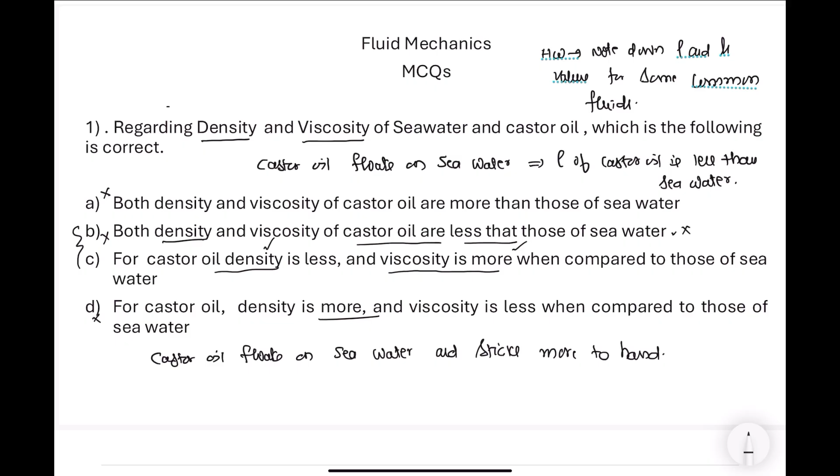I think you understood this concept, and as homework, note down rho and mu values for some common fluids. As we discussed, similarly, discuss on your own and find out why a particular value is more for a particular material or fluid, and why a particular value is less for another fluid. Compare your densities and viscosities. You need not remember the values, but try to understand the concept.

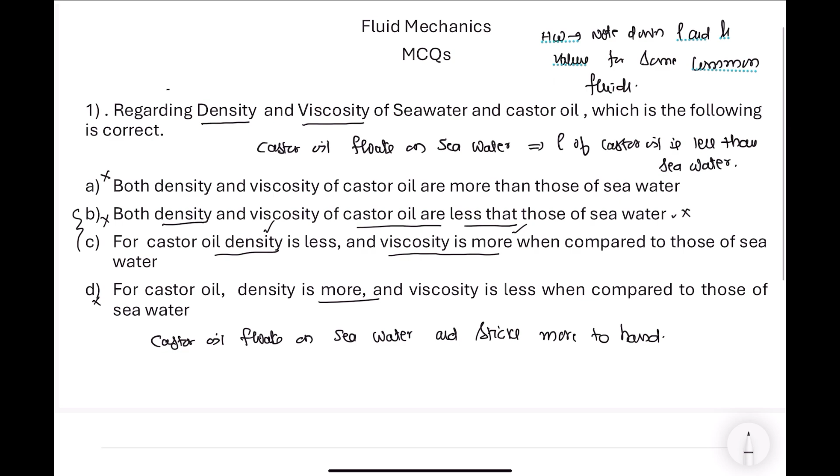Our next question is a very good question.

The equation T2 by T1 is equal to P2 by P1 to the power of K minus 1 by K, where K is the specific heat constant, is applicable when the process involved by the fluid is... Instead of specific heat constant, we can write specific heat ratio. Please read it as specific heat ratio, that is Cp by Cv, which is equal to K. We can even say it as gamma, sorry not lambda, gamma. T2 by T1 is equal to, it's a very important equation, please remember, gamma minus 1 by gamma. This value for diatomic gas is 1.40.

Now please try to understand in depth what this question says. This particular equation is valid, is applicable, when the process involved for the fluid is of a certain type. There are many types of processes for a fluid flow. On this topic, many questions are asked in staff selection JE examinations, especially regarding pressure variation with temperature as you go up in altitude on earth. That type of question was asked in 2024. Now, it's not that the same type of question will be asked again. The question can be a twisting and deep question like this one also. Ultimately, we have to understand what the process is. The process is controlled by the relation between temperature and pressure, given by this equation: T2 by T1 is equal to P2 by P1 to the power of gamma minus 1 by gamma.

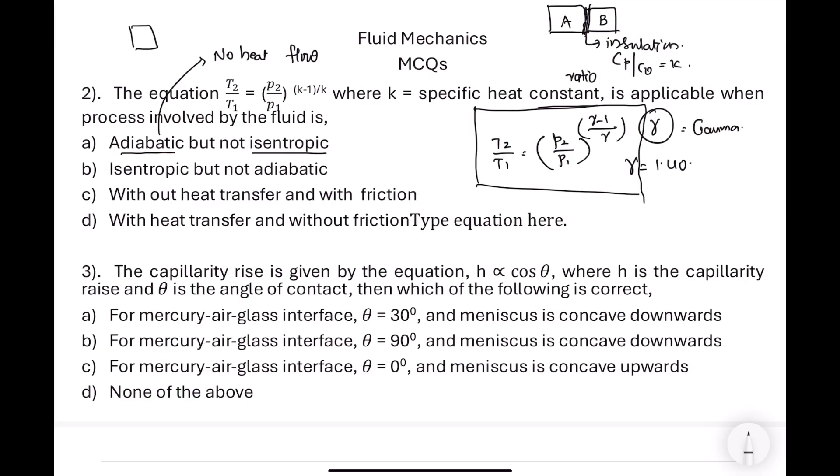Then you should know what is adiabatic and what is isentropic. Adiabatic is the process where there is no heat flow across the boundaries, no heat transfer across the boundaries. That means there is insulation. Consider one body A and body B, there is a boundary and it is insulated between A and B. Insulation is there, so there is no heat transfer. For example, take another body, put it in an insulating container like this, and there is no heat transfer from this to the atmosphere. This is also called an adiabatic process. That means when there is no heat transfer, that process is called adiabatic process.

Now, what is isentropic process? Isentropic relates to entropy, entropy is same. Entropy is same means there is no friction. Isentropic means no friction. Adiabatic means there is no heat flow. This equation is valid when it is both adiabatic and isentropic, that means there is no friction and no heat transfer.

Then we can get these ideal equations. We have simulated a system wherein we thought that there is no heat transfer and no friction involved in the process. If friction is involved in the process, what happens? Friction creates heat, that means heat should go on increasing because of the friction, and entropy goes on increasing. Iso means what? Iso means constant, that means entropy is constant. Entropy being constant means there is no friction, that means heat is not getting generated. Neither is heat transferred from one body to another or from one environment to another, nor is there any automatic increase of heat in a system. Then that system is called adiabatic and isentropic.

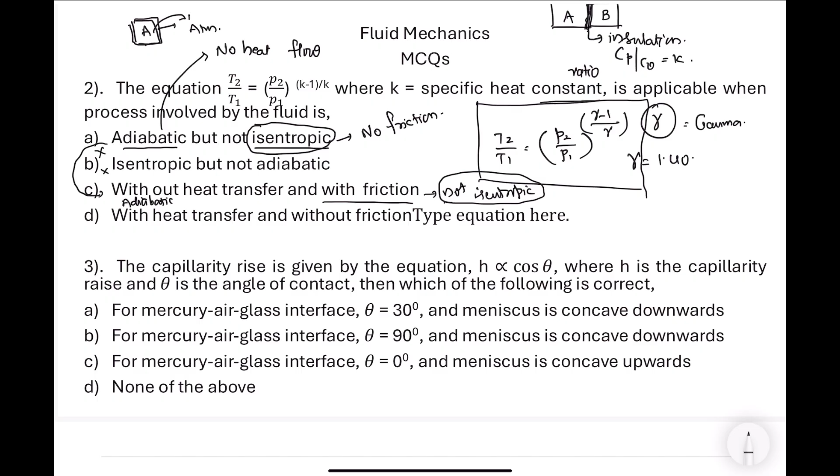Without friction, with heat transfer and without friction, it is isentropic. With heat transfer means non-adiabatic.

In this beautiful question, the answer is not given. A, B, C, D all are wrong, and this question is made by me, only to make you aware of the engineering meanings of the processes. It's not about your correct answer or wrong answer. The equation is applicable when the process involved by the fluids is both.

Isentropic and adiabatic. Isentropic means no friction. Adiabatic means no heat transfer. Please try to understand this.

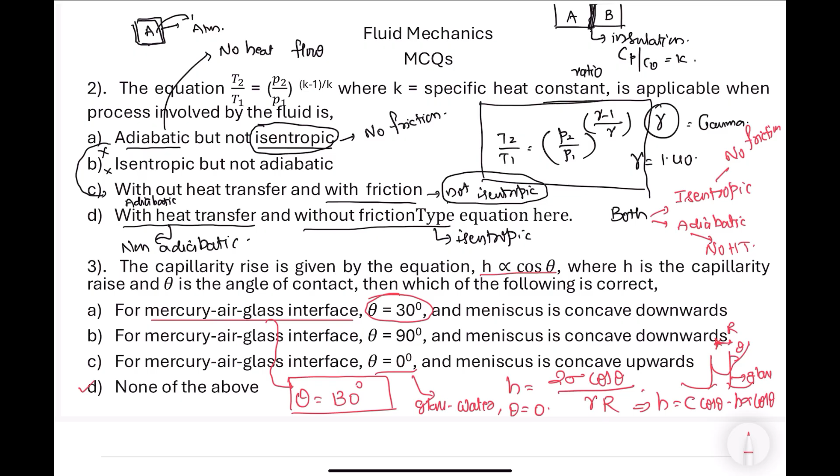Next we will go to question number 4. The vapor pressure is the pressure of the vapor exerted by gas vapor at a particular temperature. We can even call it the saturated vapor pressure. The value of the saturated vapor pressure of a particular material at 20 degrees centigrade.

Instead of material, we can say fluid, or material, or anything. At 20 degrees it is 2.34 kPa. Usually, it is always better to remember the STP values, standard temperature and pressure values, of different fluids. That's very, very important, because questions may directly involve certain constants at STP and NTP, normal temperature and pressure, standard temperature and pressure. 20 degrees centigrade involves the standard temperature; we can say it is a laboratory temperature, or a temperature at which we regularly measure the values.

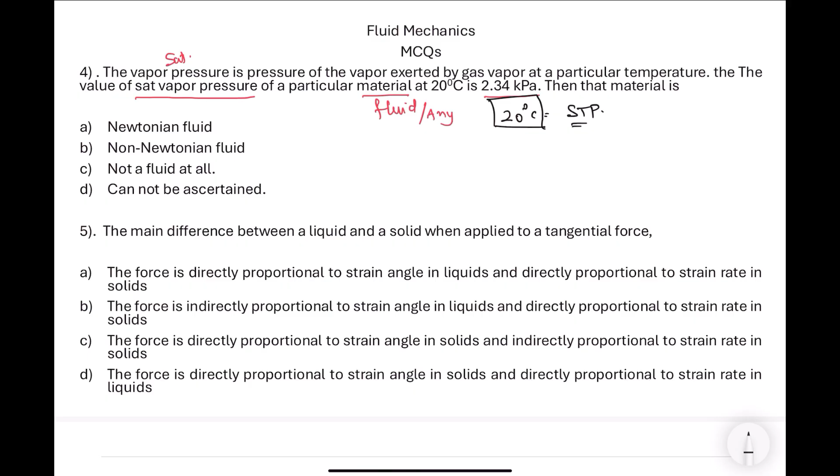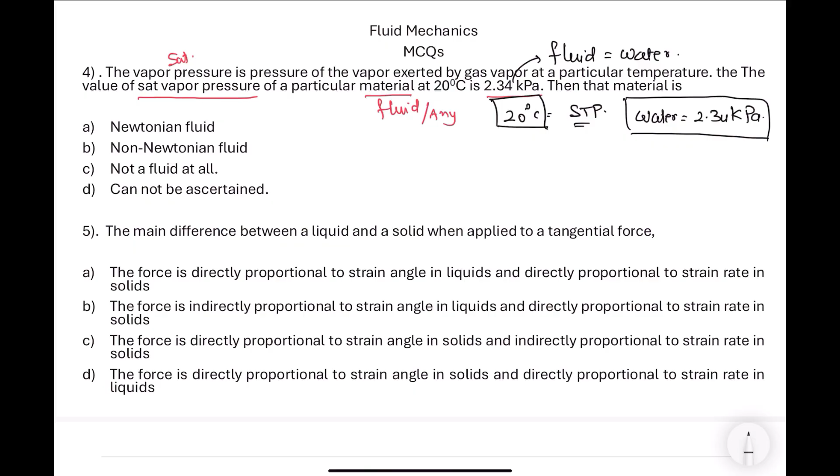The value of saturated pressure at 20 degrees for water is 2.34 kPa. Please remember this value. For water, that means indirectly with this value I am telling it is a fluid and it is equal to water. If you know this value, then you can easily understand what is it. What is that material? That's a fluid and that is water.

Is water a Newtonian fluid? That is the question here. What I have asked, you know it is water. Then that material is a Newtonian fluid. Is it a Newtonian fluid? Is it a non-Newtonian fluid? Or is it not a fluid at all? This question is wrong, because we found that material as water and cannot be ascertained. This is also partially wrong. Now we have to find between Newtonian and non-Newtonian fluids.

For your information, water and air are Newtonian fluids, because they follow Newton's law of viscosity: tau is equal to mu into du by dy. This is what Newton's equation states. Water and air are Newtonian fluids. We just say water and air are the two important fluids.

Questions can be asked by giving the saturated vapor pressure, melting temperature, boiling temperature, or density of water. What is density of water? It is 1000 kg per cubic meter at STP. Then what is the density of air? That is equal to 1.204 kg per cubic meter. Please remember, the density of air is almost 800 to 900 times lesser than that of water.

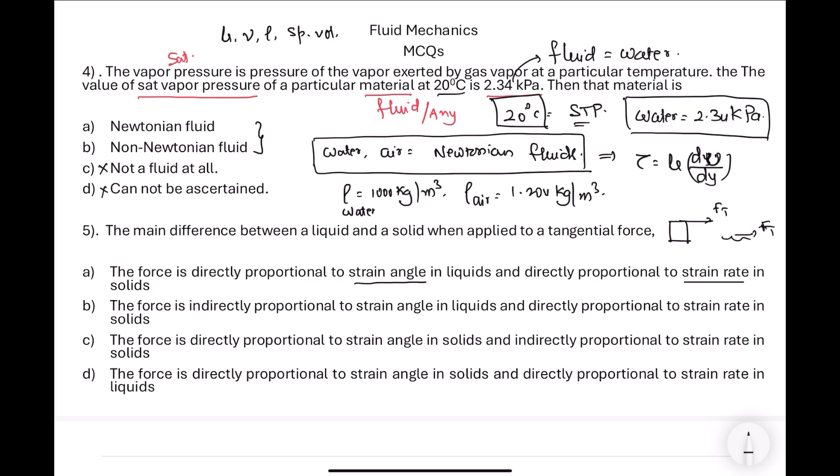Now, for example, let us try to understand the process of this tangential force effect. On a solid surface, take a rubber, like a school student's eraser, keep it on the table, and put your hand on top of it and give a little push. What happens? The rubber bends like this. Do you agree? The rubber takes a new shape like this.

Do you agree? This angle is called the strain angle. Because it is a solid, you can measure the strain angle. As the force increases, what happens to the strain angle? It increases. That means strain angle is directly proportional to the tangential force in case of solids. The force is directly proportional to strain angle in case of solids.

Now, in case of liquids what happens? Remember the definition of liquids from my first lecture: whatever may be the smallest force you apply tangentially on a liquid surface, the liquid goes on moving and flowing as long as that small force is applied, irrespective of the quantity of force. That means strain angle cannot be formed here because the fluid is continuously flowing. Hence, the strain angle concept is not applicable in case of liquids.

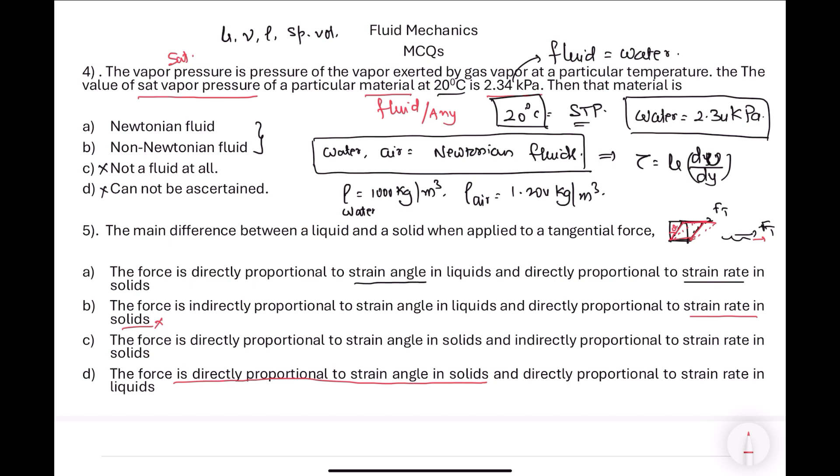Strain angle is not applicable and strain rate is not applicable in solids, hence that option is also wrong. The force is directly proportional to the strain angle in liquids - strain angle is not applicable in liquids, hence wrong. Whereas the force is directly proportional to the strain angle in solids and directly proportional to the strain rate in liquids. As strain rate increases, the flow increases. The force increases, and as force increases, strain rate increases.

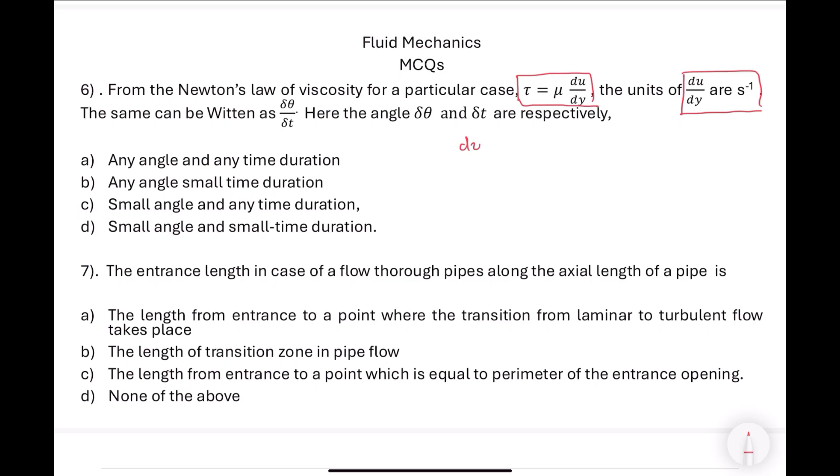From Newton's law of viscosity for a particular case, tau is equal to mu into du by dy. The units of du by dy are per second. What is du by dy? It is change in velocity, so dimensions will not change, meters per second, divided by change in distance, also meters. The meters cancel, giving 1 by second, that is second to the power of minus 1.

Now, can we write the same in terms of delta theta by delta t? I have shown you in the rubber example, the original rubber is like this, and after application of some tangential force, this made an angle theta, in a time delta t. Does theta have any dimensions? And what are the dimensions of delta theta by delta t? They are also per second - degrees or radians, whatever you call it, radians per second, degrees per second.

Mainly we can approximate du by dy with delta theta by delta t, where delta theta and delta t are the angle and time respectively. Can it be any angle? Can the time be any duration - can it be infinity, can it be 100 hours? Can you go on applying pressure on a rubber for 100 hours? You can apply the pressure for a very short duration and a very short angle, meaning small deflection. If you take material like steel, the deflection can be very small. When you take rubber, the deflection may be larger compared with steel, depending upon the crystalline structure of the material concerned.

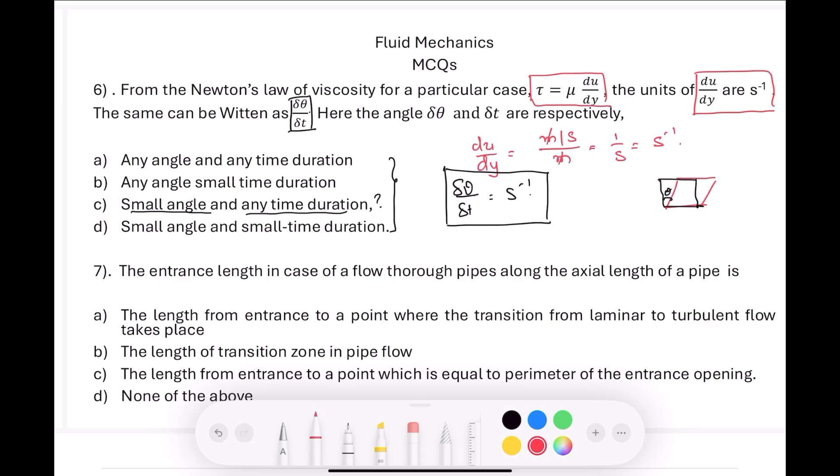Now, small angle is accepted - it can be for a small angle. But is it for any time duration? That is the question mark. This question I am leaving to you as homework, a question I have made on my own to test your knowledge. Small angle is accepted - find out whether it is C or D, which one is correct. Is it for a small duration or any time duration? Please see the textbooks, try to understand and answer this question.

Sometimes I feel that a question out of some 10 questions should be left for your thinking process, sharpening your thinking process.

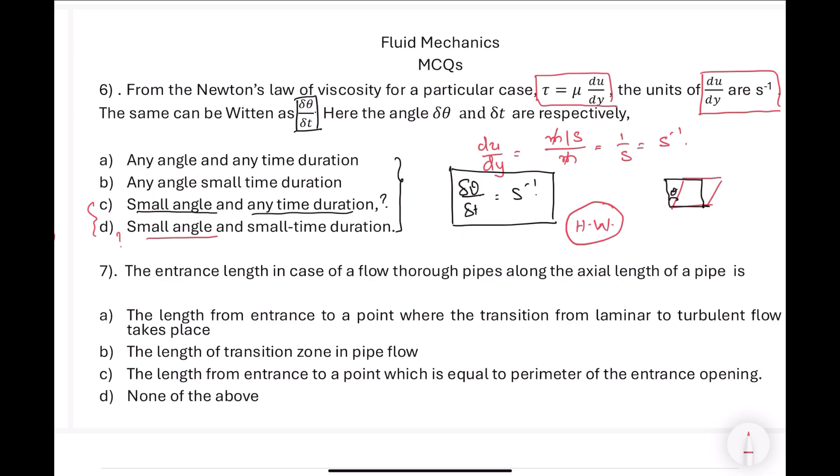Next comes the entrance length in case of a flow through pipes along the axial length of the pipe. I have explained in the first lecture what is flow through pipes - it's very important and a common example. Water distribution, gas distribution companies, chemical distribution facilities in plants and general water distribution, everything is dependent on pipes. Now, there is a pipe, and fluid is flowing inside it. The pipe is, let us say, circular, or it can be rectangular also, depending upon the requirements.

What is the axial length? Please try to understand. Movement along the axis is called axial length, measurement along the axis. What is the radial length? When you measure the length along the radius, this is radial length. Please try to understand - axial length and radial length.

Now, the entrance length in case of flow through pipes. There is an entrance - you send the fluid inside the pipe and it goes inside and flows in the pipeline. This is the entrance point, point A is the entrance point. There is one term called entrance length - please remember this, it is very, very important concept in fluid mechanics.

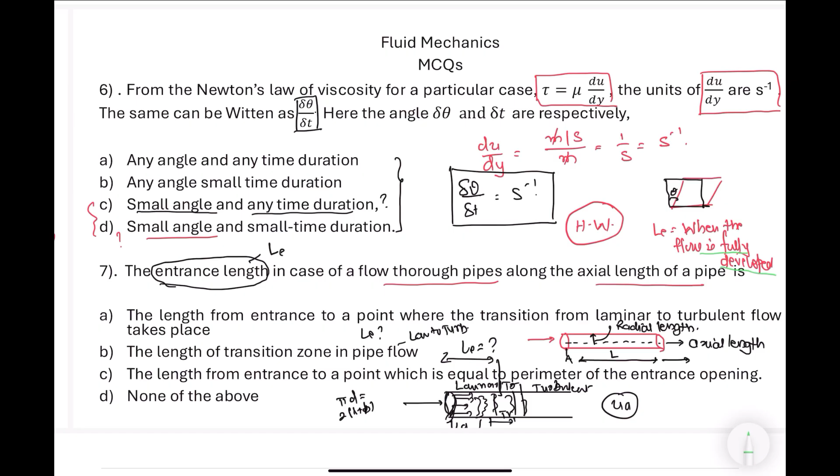Entrance length is the length when the flow is fully developed. Please try to remember this sentence. When the flow is fully developed, that means when a flow starts inside a pipeline, the flow will not be fully developed like this, as I have told you many times in previous lectures.

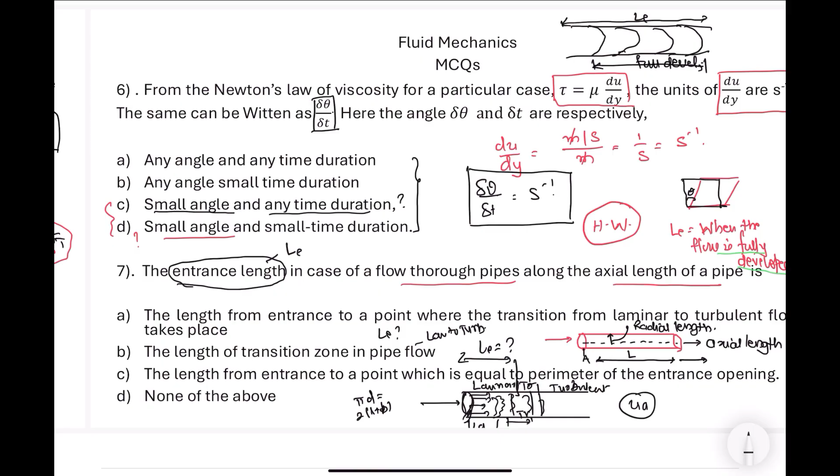The pattern will be like this, then it will be like this, then it goes like this, parabolic, and this is the length where it becomes fully developed. That means when the distribution pattern becomes regular and the flow is fully developed, the length from the entrance to the place where the flow is fully developed, that length is called LE. So the answer is none of the above.

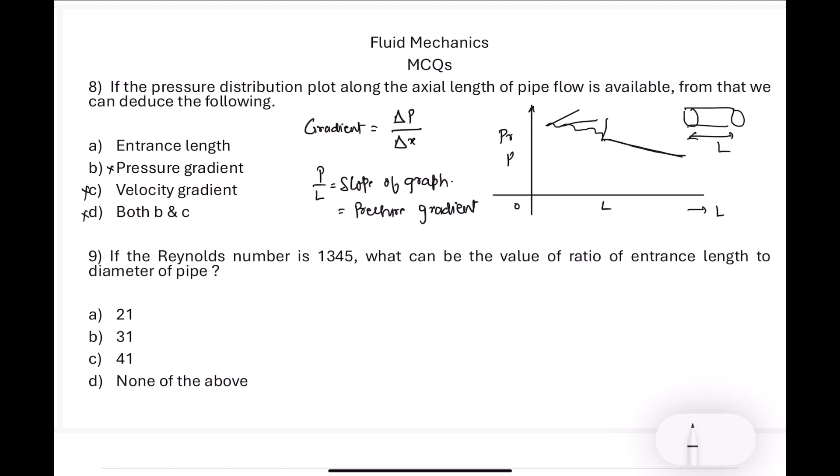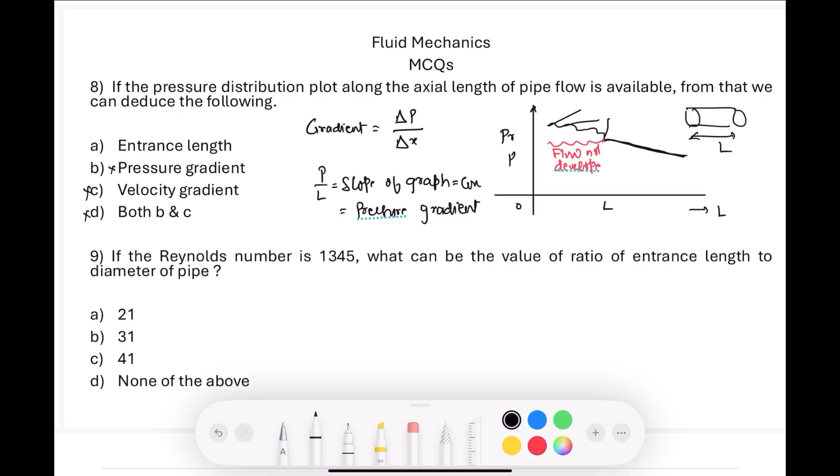Now, when do we find out the entrance length? That's the question here. The entrance length can be found out from when the flow gets fully developed. What happens here? Flow is not fully developed. Please see, here flow is not developed fully, but here the gradient slope is constant. Slope is constant, that means the slope of the graph is constant, which implies the flow is fully developed.

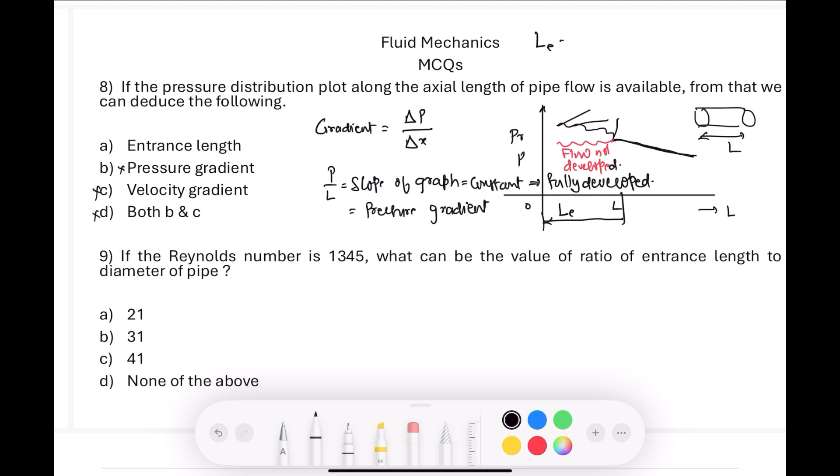If the pressure gradient is constant in the pressure distribution versus axial length graph, then we can say the flow is fully developed. The distance at which the flow is fully developed is called LE, the entrance length. That means dou P by dou X is equal to constant for fully developed flow. Please remember this. The answer is A.

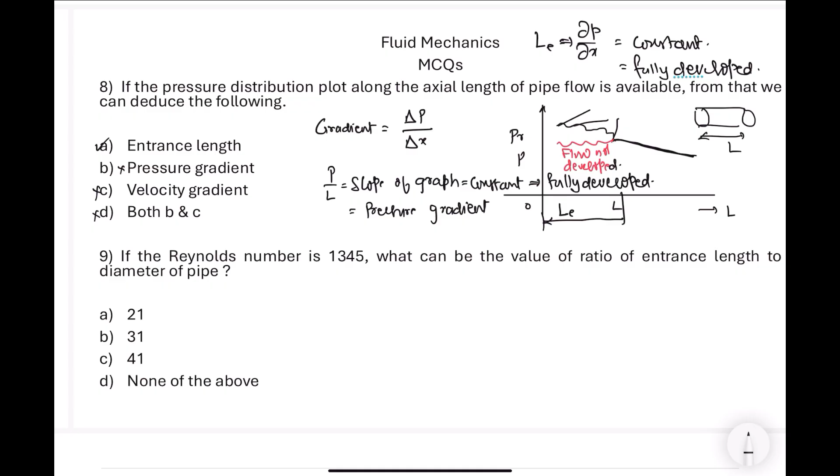If the Reynolds number is 1345, what is Reynolds number? Reynolds number is equal to rho Vd by mu. I have explained very well what is Reynolds number and what type of velocity to take in the Reynolds number, in my first, second, third lectures. Now this Reynolds number of 1345 is given. What is the importance of Reynolds number?

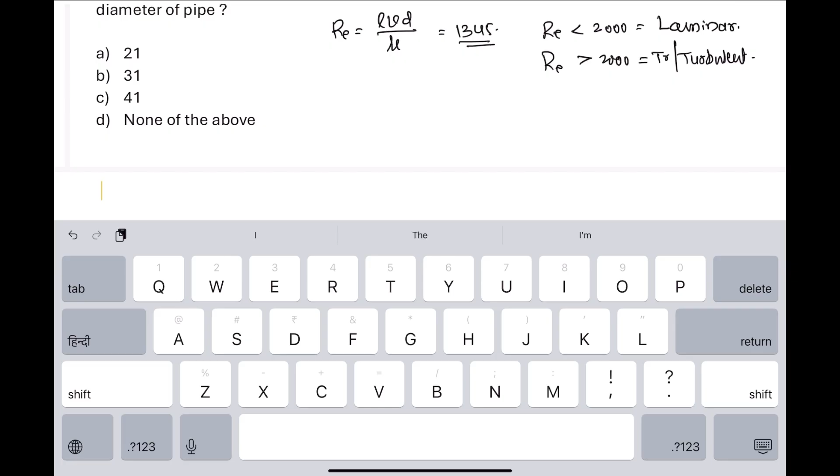If Reynolds number is less than 2000, the flow is laminar. If Reynolds number is more than 2000, it is transition or turbulent; you can give some value for transition up to 2500, 2700, then it becomes turbulent. Now here the Reynolds number given is 1345. That means the flow is laminar.

For a fully developed laminar flow, the value of LE, entrance length by diameter, is equal to 0.07 RE. Therefore LE, what is asked, is the ratio of entrance length to diameter. This is a very, very important ratio, LE by D, which is equal to 0.07 into 1345, that is approximately equal to 91.

The value of 91 is not there among the options, hence none of the above is correct. It's a very simple formula, 0.07 RE. Once you know the Reynolds number, you can find out whether the flow is laminar or turbulent. For fully developed laminar flow, LE by D equals 0.07 RE, giving 91. This is what we should know, the LE by D values. These small concepts are very well covered in Modi and Seth's Hydraulics and Fluid Mechanics book. It's an excellent book, please read it.

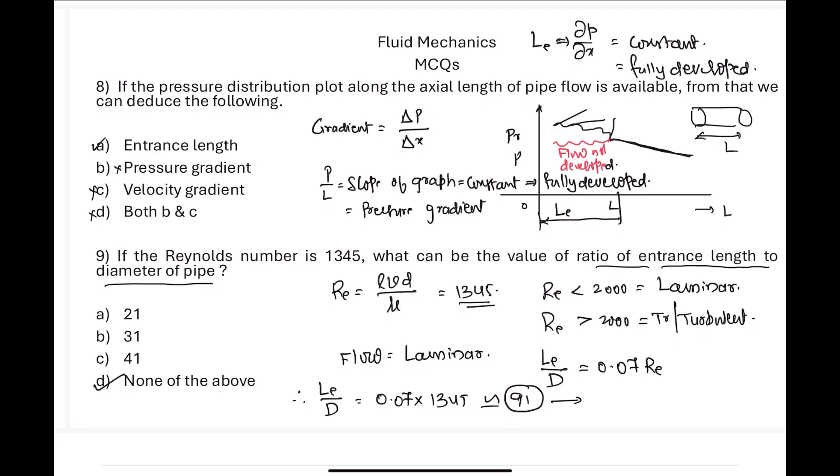Please review my lectures and understand the concepts of fluid mechanics, which may not be given in any textbook. It is out of my understanding and interest towards the subject that I am giving these lectures. Please try to take advantage of these, try to score high in your examinations, be it GATE 2026, UPSC, or SSC JE examination. Best of luck to everybody.